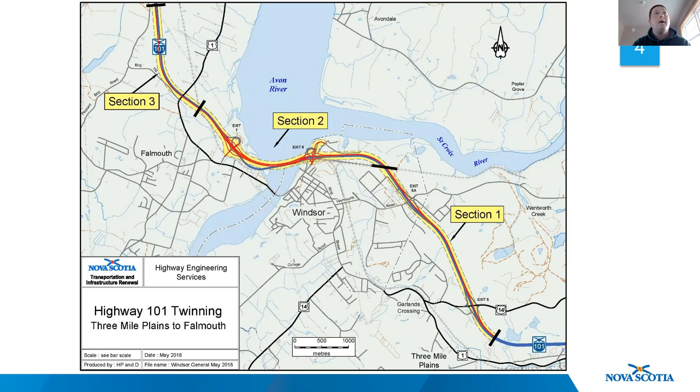Section 1 is generally from exit 5 down to just west of exit 5A at the Windsor Railway overpass. Section 2 got broken up into two sections: 2A, which goes from the railway overpass to exit 6, and 2B, which is basically from exit 6 into exit 7, the Causeway area. And then section 3 goes from exit 7 down to the current twinning section just before Hantsport. So that's just a general overview, so as we get into the next couple of slides, you'll know where we're at.

So the first slide is generally talking about updates to section 1. What we've done so far is we constructed the new westbound lanes a few years ago, paved them, and opened them to traffic last year. Then we started working on the eastbound lanes and did some upgrading to that. This fall and winter we actually paved them, and now section 1 is open to fully divided traffic.

Probably today, anyone that's been through the town will notice that the barrels and a lot of the temporary traffic control devices are starting to come down now that we've installed and wrapped up the center cable median barrier. We did the replacement and new construction of two structures at Trunk 14, the two new structures at Wentworth Road, and we also replaced the Windsor Railway overpass with a new multi-plate structure.

We will be in this section again this spring for a bit. We do have some deficiencies to clean up, some shoulder gravels to put on, and some general cleanup to do. So we will be around, not for a long period of time. It'll be 4 to 6 weeks, but then we'll have that section wrapped up and we'll be out of there for a while. So go ahead, Justin.

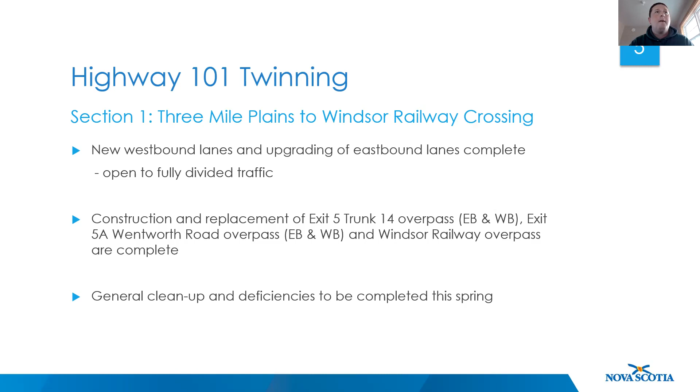So the next couple slides are just some general photos. Here we're at exit 5, looking west back towards the valley. You can see we're open to divided traffic here. The next slide, we're at 5A, so you can see the Wentworth Road roundabout, and we're looking east back towards Halifax.

This was taken yesterday. The barrels and all the temporary traffic control devices have been removed as of today, so now this is a fully divided section of highway. And again, we're still at 5A, but we're looking west in the opposite direction. Same thing, those temporary devices have been removed and we're open to full divided traffic through this section.

So as we get into 2A, we're basically from the Windsor Railway overpass coming back to exit 6. We've completed the new westbound lanes, so that was new subgrade work. We've paved it and opened it to divided traffic as far as exit 6. We do have a temporary transition from 4-lane divided to 2-lane, 2-way traffic at exit 6 as we approach the causeway, so the causeway is still 2-way, 2-lane.

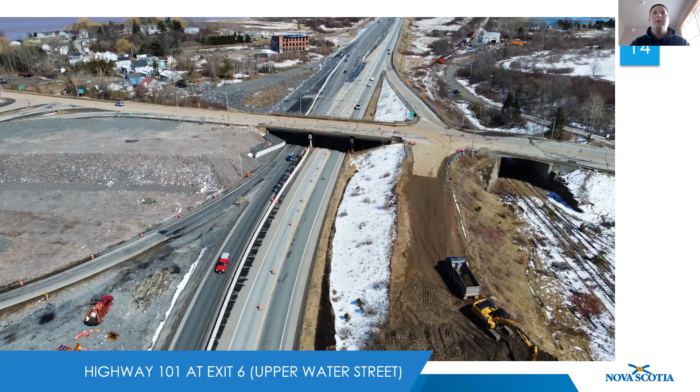And we go on to the next one, which is section 3. So this is kind of an update on section 3. So the eastbound lanes have been completed, and probably most people notice that they're paved, and it's set in there. I'll talk about that in a second. The new wildlife structure, we did put a wildlife or deer crossing structure in this section, and that is now officially completed. And we did finish the extension to the Elgin Creek box culvert. And we did also upgrade, again, some municipal infrastructure, water, sewer crossings, in this section as well.

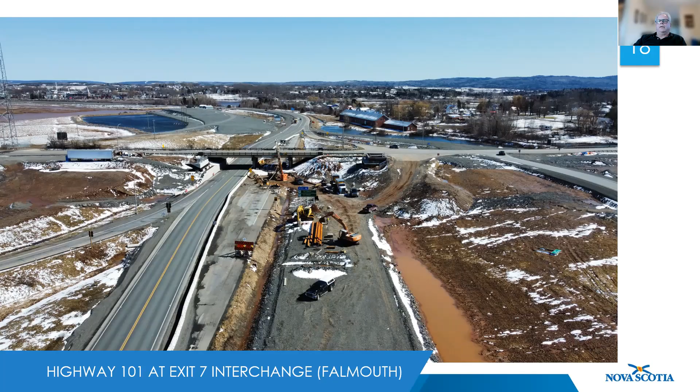Thank you for that, Lyle, and thanks for your consideration of the suggestions. Thank you. Thank you, Liz. And Liz, there's no quota on questions, so I'm not quite sure what's happening with your hand raising. There's nothing that would be preventing it, that I know of at least. Anybody else? I don't see any other hands showing. Going once, going twice, three times. Lyle, thank you very much. Thank you, Guy. And Justin?

Yeah, thank you, Lyle. That was a great overview. And I've got my power back, so that's good news as well. Hopefully this will be a little more seamless and reliable.

So thank you, everybody. I'll kick off the next section of this presentation, providing a general update, recap, and status update on the Avon River aboiteau and causeway upgrade components. And then we are going to turn it over to CBCL to get into a little more detail on the design progress.

So just to first recap, the primary objectives of this project from the beginning and from a provincial perspective have been to improve public safety. Enhanced flood protection is the big one associated with the aboiteau, to ensure climate change resilience and to protect against flood risks and vulnerability to sea level rise in the future. This is also coupled with the need to protect critical public infrastructure, communities of Windsor, Falmouth, and surrounding areas, as well as valuable agricultural land.

Improved highway safety, obviously from a Public Works perspective, is a major objective as well, through completing the twinning of Highway 101 across the Avon River, while also benefiting from the flood control system to protect the highway and the associated bridges. That's why this project was pursued in a coordinated way to address both of these public safety needs.

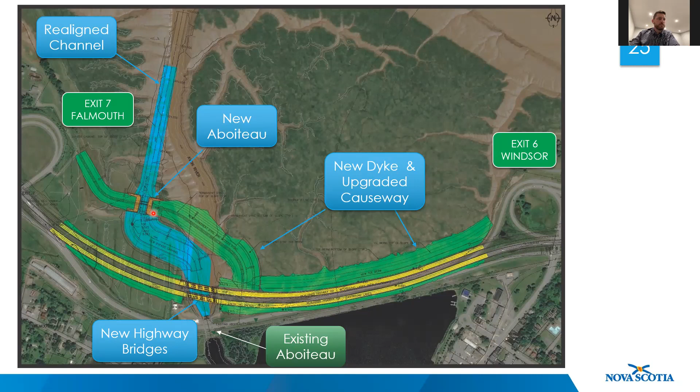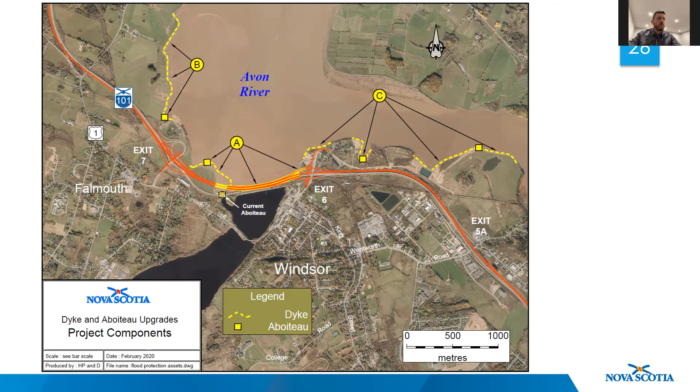And lastly, to recap, the design approach for the aboiteau and the causeway upgrading has been to focus on a flexible and adaptable solution. So one that meets both the needs today, but also is adaptable and flexible to meet the needs in the future. So the aboiteau has been designed with a wide range of functionality for both flood protection and fish passage, and includes a range of potential operating scenarios.

One of which being maintaining a freshwater lake, and this was initially proposed to DFO in our application of 2020, but following that application in March of last year, it was deemed inadequate for fish passage. And actually the following spring is when DFO implemented the current ministerial order, which has changed how the existing aboiteau has been operating ever since.

The other two scenarios that we've been focusing on are what's considered a brackish lake scenario. So this scenario basically allows some tidal exchange through the aboiteau, but maintains a fairly consistent water level upstream that would be comparable to what that historic lake level was, but it would be higher in salinity and sediment as you would expect in more brackish conditions. And the last one listed here is a dampened tidal scenario. So it also can allow a greater degree of tidal exchange, creating basically a more natural estuarine environment.

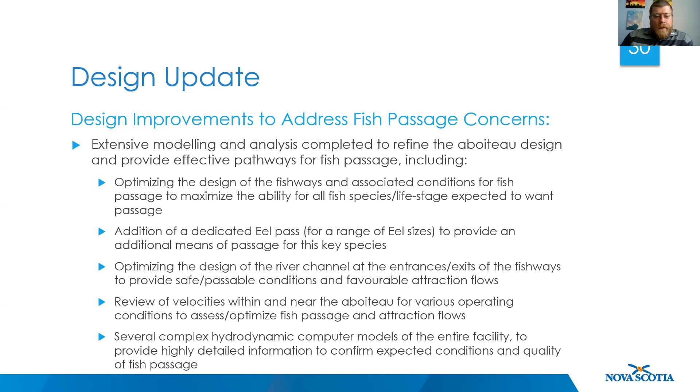Associated with that, one of the key areas that we've been continuing to refine is how the water can be controlled as it goes through the structure, in terms of how the various channels and gates are able to be operated. And as Justin said, there's a wide range of scenarios that these can be operated to achieve a number of objectives. But at the end of the day, we have to satisfy the regulatory requirements and mitigate flood risk. So that's always the goal for these various design efforts. So based on feedback from DFO, we have been focusing on the operating scenarios involved with tidal exchange, which include the brackish lake and dampened tidal scenarios that Justin suggested earlier.

One of the most recent modifications of the gate design allowed for a vertical slot in the main channel itself to provide more passage opportunities at all water depths for various species that like to swim at different depths, in different velocities and different conditions, and to avoid significant pressure drops for any fish or other types of species that want to use this but don't find their way to the fishways or the eel passes themselves, to avoid large pressure changes as they're going through the main channels, which are primarily the flood control channels,

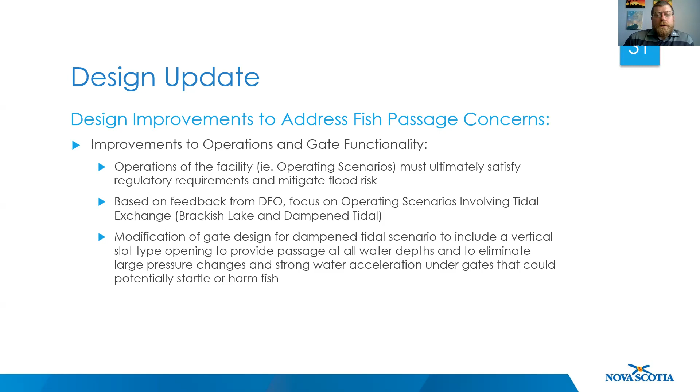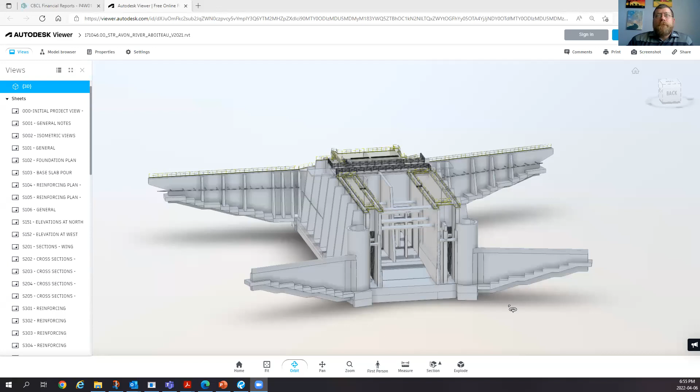Just one moment, guys. I'm gonna have to share. Yeah, you may want to share instead there, Colin, then we'll jump back to my screen here. That's what we'll do. All right, can everybody see that? No change yet. Oh, here, I have to actually hit the share button, so I think it's probably good now. Is it moving around? Yeah, we're seeing it now, Colin.

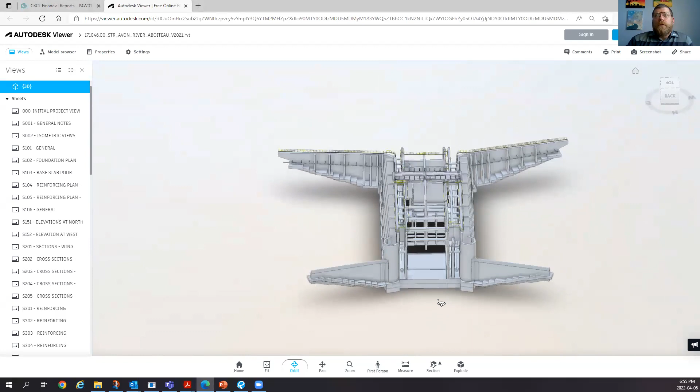Perfect. So I'll just start at the top here, so you can see this is kind of what it looks like from the top down. This is the Bay of Fundy side, and this is the Lake Pisiquid side. I'm going to go and look at the end view for now, so you can kind of see clearly where the main openings are here. Fishways are on either side. You can see some of the baffle structures are inside, and then this is actually the eel pass here.

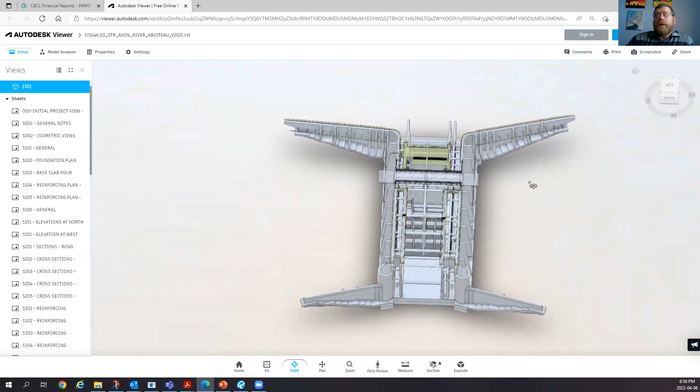You can see there's some significant retaining walls to allow us to control scour and erosion around the structure, and to contain the embankment and dike slopes. There's an access bridge on the top and a number of catwalks and manways to allow for maintenance and whatnot. What's not shown here are the gates. There's a series of gates that are planned here, including what we call a passive flap gate, which is sort of a traditional aboiteau gate, as well as roller gates.

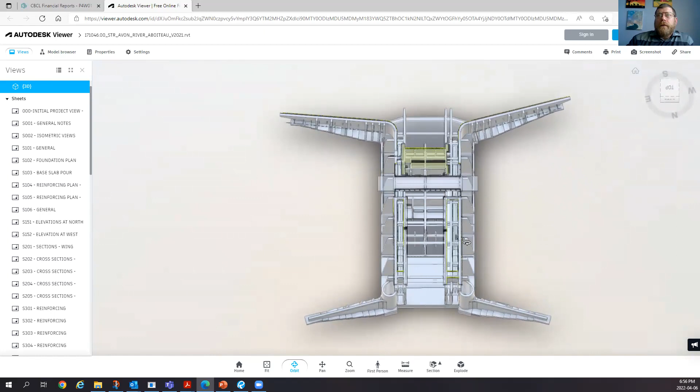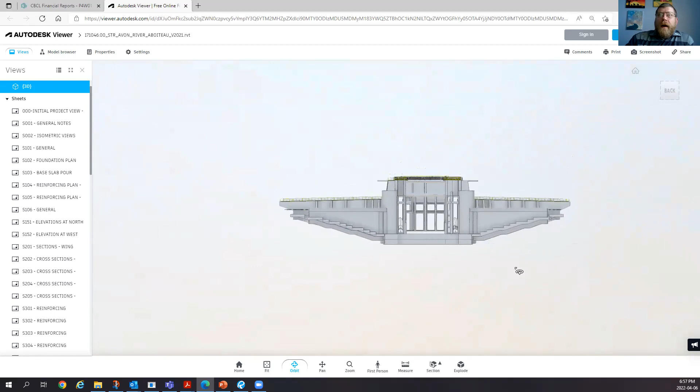There's a few versions of the flap gates themselves for the main openings, as well as emergency backup in case there was a blockage of some sort or something stuck in the main opening, so that in case of a blockage at the worst time, where maybe you have a major storm happening, there's always a safety net for that to be relieved, I guess. Yeah, so that's that. You can kind of see the front end here. There's a few additional features that have been added to improve flow conditions, to smooth the flow of water around the ends of the structure, again to accommodate or improve potential fish passage.

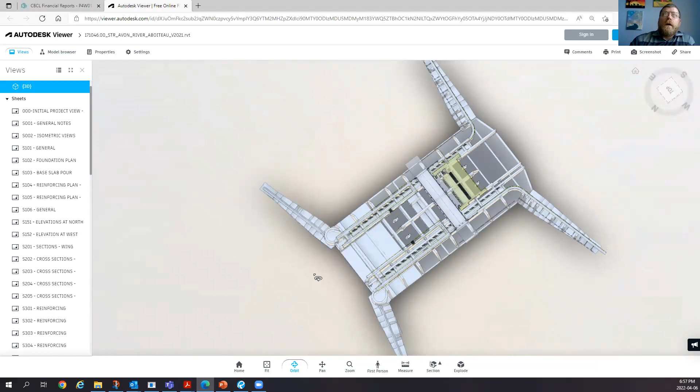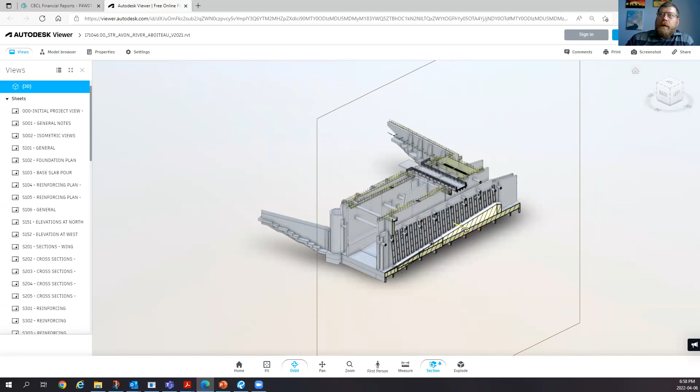I think it's probably a good overview. Maybe what I'll do is I'll just do a quick little slice through here and show sort of the inner workings of this, to see generally how each part is. So I'm just going to stop at the fishway initially, so you can see what that looks like. So this is one of the two fishways; they're the same on either side. And you can see there's a ramp to help control velocities within the structure, and then these ladder-looking items are actually baffles, which help slow the water down within the fishway and make it more appealing to fish.

I'm going to slide into the eel pass. It's not very wide, so sometimes it's hard to hit.

What's going on there? There it is. So you can see there, it's also a ramp, but it has sort of landings or resting areas. This is about, I think it was about half of the maximum slope that you can use for these types of facilities. So it'll have almost like a really coarse AstroTurf, or it's almost like a Plinko board that you would see that would be placed on this ramp, so that the small eels can wiggle their way up through the structure.

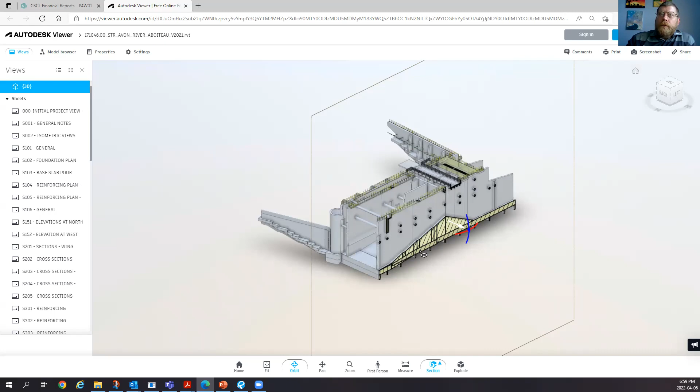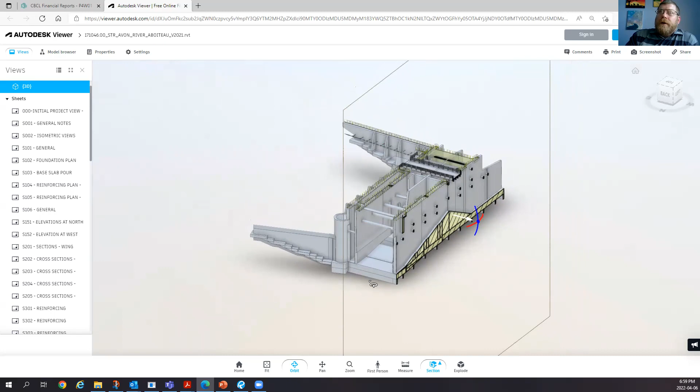And it doesn't matter if the water is low or high. Apparently they'll use it either way. We do have a water supply system that ensures that this ramp stays wet at all times, as well as a washing system that allows it to be flushed of sediment. That's been one of the major design considerations throughout the entire project, is the amount of sediment that is carried in the water here. It presents significant challenges for maintaining structures like this and ensuring they always operate the way they're intended and don't have buildups in areas and cause problems.

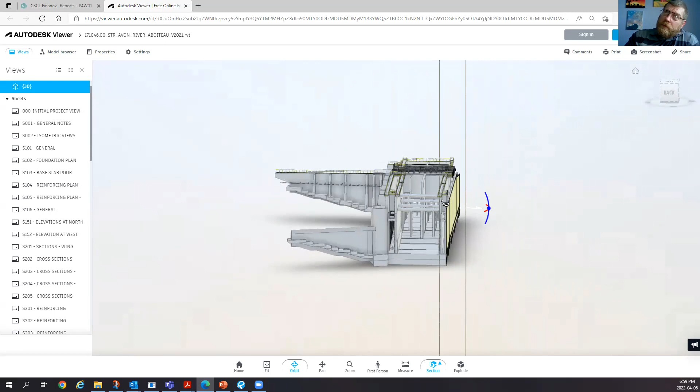You can see there's lots of supporting struts. This is a very large structure. This is approximately 20 meters tall by 25 meters wide, I guess, for the main part of the structure, not including the wing walls. So the forces that we're dealing with here are very, very large.

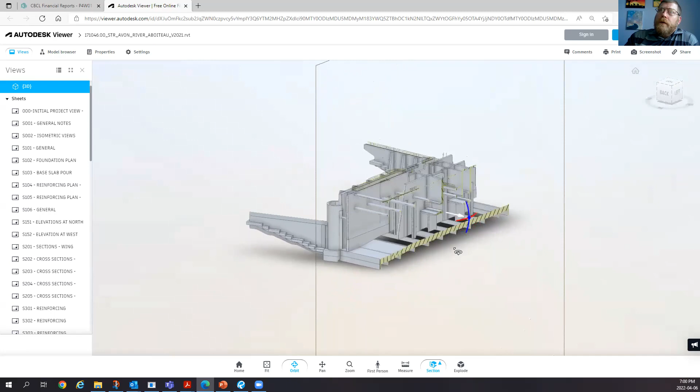So you can see here, as I keep going in, you get a sense of what the inner workings of the main channels look like. These are all structures to hold gates, both the roller gates and then the flap gates, as well as stop logs for maintenance, so that we can close off the structure in case there's a problem or just regular maintenance to complete.

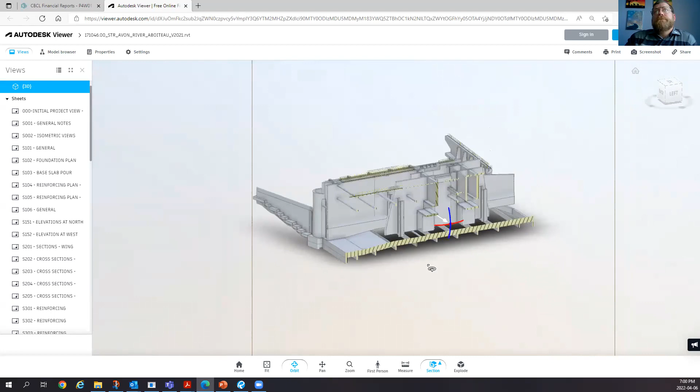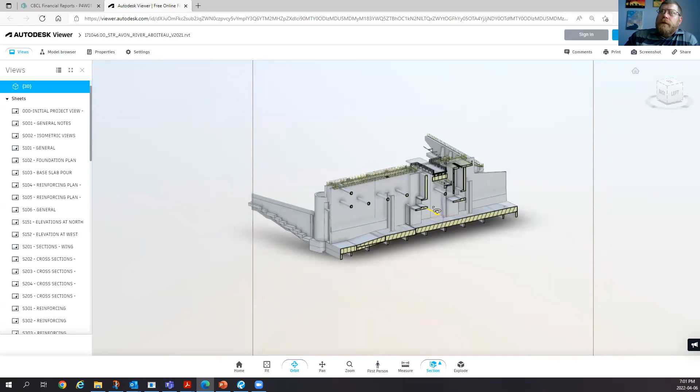And you'll see the inner structure of this is a little bit different from one side to the other, as there are slightly different gate configurations and operating requirements for both the brackish and the tidal scenarios. So that's where the design flexibility comes into play. And then, like I said, the fishway on the other side is just a mirror image of the other.

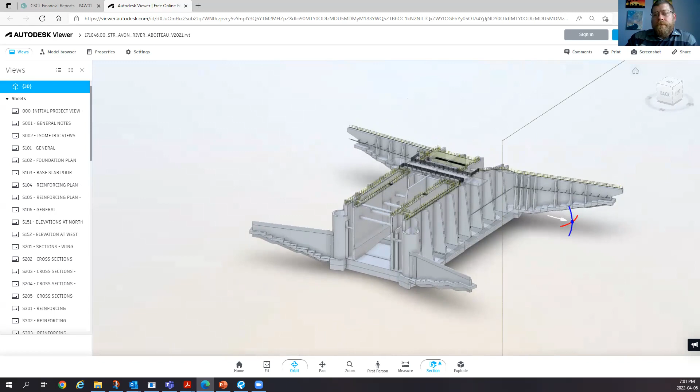So, did anybody have any questions there? I know there's a lot to take in right here, so I thought maybe this would be a good time to allow people to put their hand up. Yes, Liz? Yeah, I've got questions. Can you confirm the hierarchy of control over the aboiteau? Who owns it, who's going to run it, and who makes the decisions on it?

I will throw that question over to Justin. I may throw that to Kevin. Kevin, are you still around? Do you want to answer that, given it's owned and operated by agriculture? Yes, don't know if my video is working, but trying to click some buttons here.

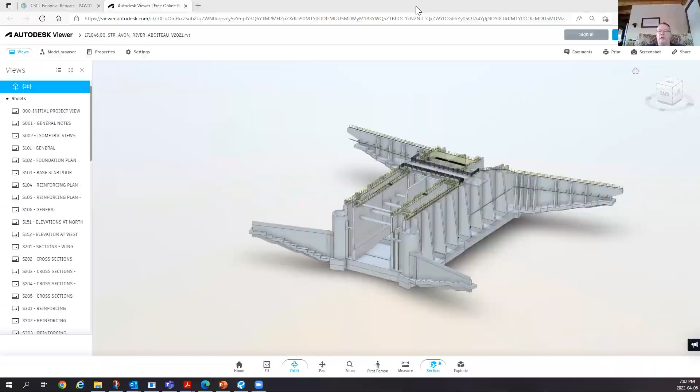So yes, we are the client, the Department of Agriculture. We operate the existing infrastructure, and we will be operating the new infrastructure. There have been some discussions about having a governance committee involved in that, representing various stakeholders and rights holders and DFO. So some of it will fall under the regulator of how it will be operated. And they have asked us to provide an operational scenario with the structure, and that's where a lot of the work has been focused this past year and a half, as Colin and Justin have described. So I'll pause there and see if that's answered your question. It has partially.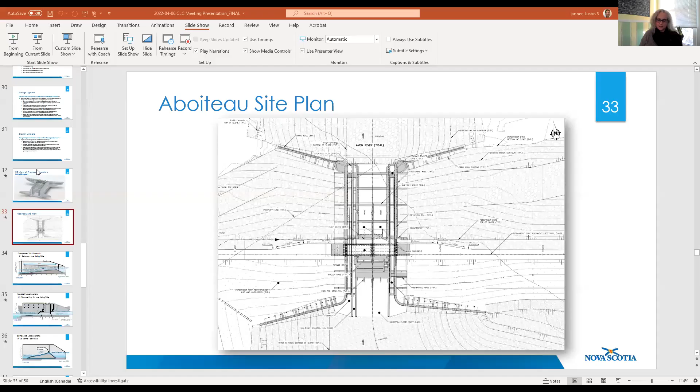Will there be a resolution process for conflicting priorities within that management team? And I'll just throw another question in there as well. Can you confirm that there's a system in place, or will be in place, to be aware of fish movement for maximum effect, kind of like an early warning system, so that we don't have one species or another, or a big lineup at the gate not getting through because they're two weeks early from their usual time frame?

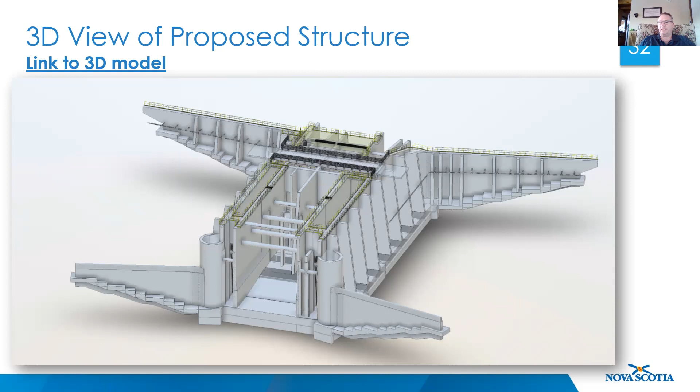So a little complex to answer in all that detail. My understanding is from the operating scenario, we're going to have dedicated fishways that are open 24/7. So there'll be some minor adjustments and tweaks on that in a major flood event. But the idea is to be able to pass fish 24 hours a day, 7 days a week, 365 days a year. So DFO is not looking for any stockpiling of fish outside of the gates in one direction or the other.

And as far as resolution aspects, we're looking for an operating scenario, and it would be more about communication and awareness and what's working and having discussions. But I don't know if there would be acceptance of a resolution that we want to change X, Y, Z. There'll be a set operating procedure on that. I was thinking conflicting priorities as we go along, not in terms of policy, but just in procedure on a time by time basis.

Yes, and it's hard to speculate on what they may be. So community flood protection would be number one and fish passage is number two. And whatever we can do to the maximum extent possible after that is how we would like to do it.

Okay. I have a question for Lyle. I have two questions for Lyle.

Just because it's been a long time since we've met, can you confirm the speed limit through the corridor once it's completed? Yeah, so as soon as we complete our full 4-lane divided highway, it will be 110. Okay. And can you confirm that we're going to have a hopper lane, I call it a hopper lane, at the far right for local traffic between exits throughout the entire construction corridor? Yep, that's correct. So the farthest right lane between 5 and 5A, 5A and 6, and 6 and 7 will all be just connected ramp lanes. So yeah, it'll be quick. Basically, that'll be a ramp lane between all exits. Yep. Sweet.

Okay. If nobody has any other questions on the structure itself, I'll touch on a few other things here as we go. So this is more just a top view of the structure, again, just to show the dike itself and how it matches into the channel a bit more. Again, you can see the top is the Bay of Fundy side, where you've got sort of the rounded noses on either side to smooth the flow of water in and out of the fishways. And then at the upstream end, you can see a similar rounded area, but slightly different just because of the different conditions and the various site constraints that we've had.

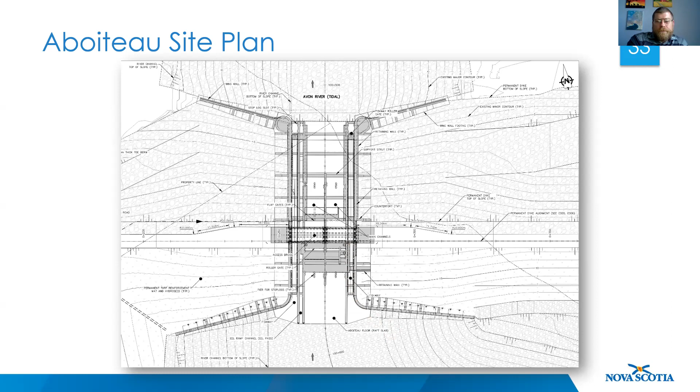Next slide. This is just a quick representation of one of the scenarios of how water will be within the fishways. You can see the ramp is intended to hold the water along the fishway at a specific depth, and one of the design challenges is the various scenarios have different operating water elevations. So the structure is designed so that we can actually alter the high end of that ramp, whether it's tidal or brackish, to optimize the flow of water through those fishways and ensure that the velocities stay within those optimum ranges for the fish.

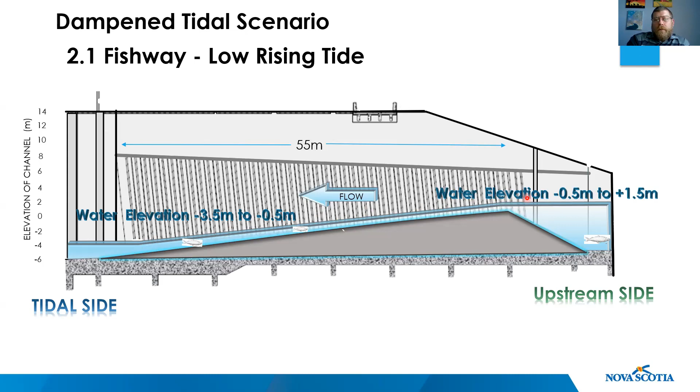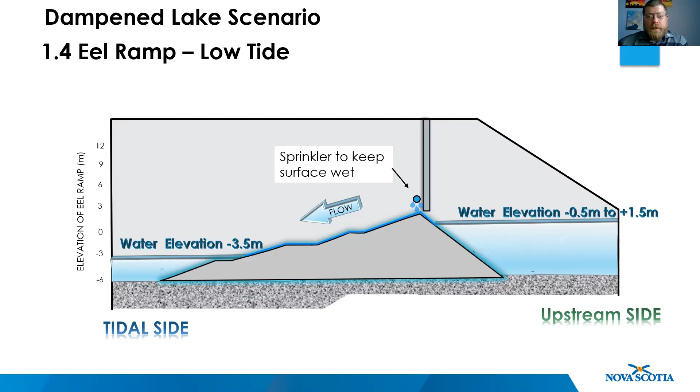So yeah, just wanted to touch on the operational scenarios a little bit. Again, for both of the brackish and dampened tidal scenarios, which we've been encouraged to focus on. The dedicated fishways and eel pass are always open for both of these scenarios, except for maintenance or the odd extreme storm event where we may find that all the gates should be closed to ensure that the town of Windsor is protected. But that's not very frequently at all.

The brackish lake scenario does allow some tidal exchange while maintaining a constant water level. That's the key aspect of this, and that water level is equivalent to the historic target water level that Lake Pesaquid has been operated at.

And the dampened tidal scenario allows for a larger amount of tidal exchange and a more, Justin, you said that word a lot better than I'm going to try. Estuarian, or I can't say it. Estuary environment. And it'll fluctuate by 1.5 to 2 meters. Probably a little less than the full range most of the time that we see here.

And the level of the upstream is likely going to be a little bit higher than what's there now, but we don't have a ton of current data on, I guess, the upstream level fluctuations as it's been operated for the last little while. I think that's what's up next there, Justin.

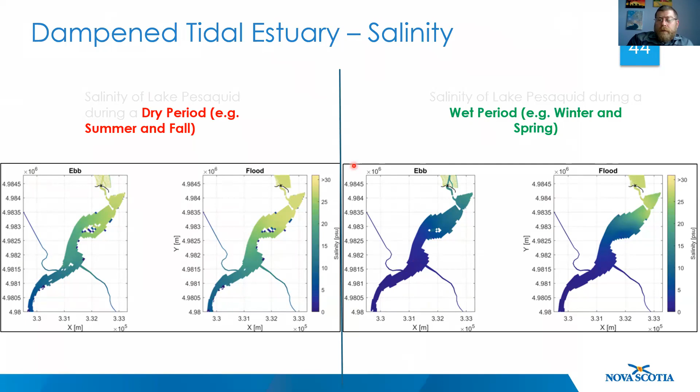So I know one of the questions that Liz had was around the post-construction monitoring plan. Maybe before I jump into that, I should ask if there's any questions on the design, because I'm going to jump to the post-construction monitoring plan, and Melissa's going to take over from here. But maybe I'll look for hands and we can go from there. Ken, I see there's multiple hands, so I'll let you direct traffic there. Sheldon, go ahead.

Yeah, just curious. I see the salinity stuff is on there, but what I don't see is anything on the sediment deposits, and I know that was part of what was brought up in some of the early design scenarios, that there's significant sediment coming in with each tide, and we continue to build up those mud flats. In either of these scenarios, have we modeled what that looks like, 5 years out, 10 years out, et cetera? Yes, there has been modeling done on the sediment accumulation.

I think the tidal scenario is expected to carry more sediment in, but at the same time carry more sediment out. So I think the expectation is that there will be a buildup of sediment, particularly on the lake closest to the highway. And I think we do have more details on that. I don't have it here with me, but if you reach out to Justin or even DFO, I think they do have more information on that from us that we should be able to provide.

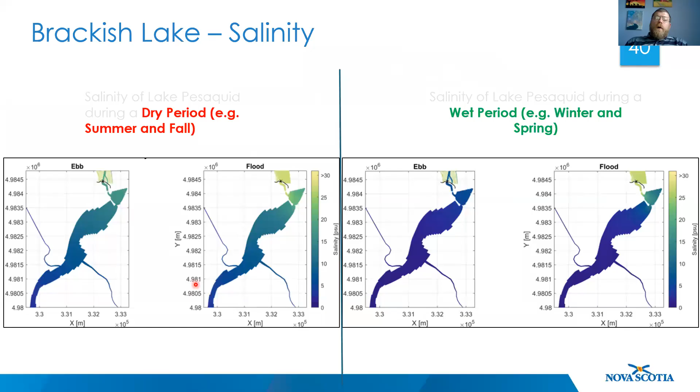Under the brackish scenario, you're going to see a water level very similar to what you have traditionally seen, or at least seen over the past 40 years. There might be a half a meter change up and down during significant storm events, and during periods of dry or wet there can be a little bit of additional fluctuation, but generally speaking, it's quite close to the existing or the original lake, we'll say.

For the tidal exchange option, the level of the upstream lake is expected to be most of the time in the 1.5 meter range between low tide and high tide. And again, during larger storm events or larger tides or a combination thereof, that range could reach the 2 meter range or so.

Colin, just to add to that for additional reference, I think we've determined the low tide under dampened tidal would be somewhat close to what you're seeing there today under the ministerial order, possibly slightly higher in elevation. And the high tide under dampened tidal would be about 2 feet below that historic lake level that has been around for several decades. So it's about 2 feet lower at high tide, and a little bit higher than what you're seeing today under the ministerial order at low tide.

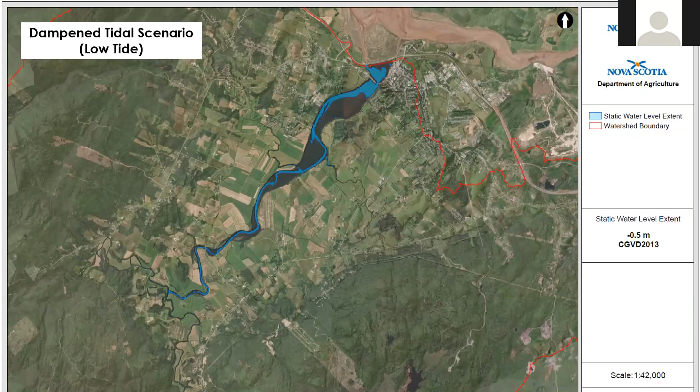Yeah, Jim. Yeah, thank you very much. I guess my question, hard to know where to weigh in here. There's so much here, and we haven't been on the same channel here for the last year and a half. So it's like playing catch up and reacquainting with everything.

So I don't want to take it back with a question, but back on the structure when you were showing the inner workings of it, which appears to be quite complex and quite detailed. In fact, if I can, without offending anybody, it almost appears like a maze. And maybe I'm not looking at it properly, although I am seeing one head kind of nodding up and down. So I guess I'm not that far off on that. Is that for the control of the speed of the water that all the, I'll call it the guts of the inner workings of that is in place?

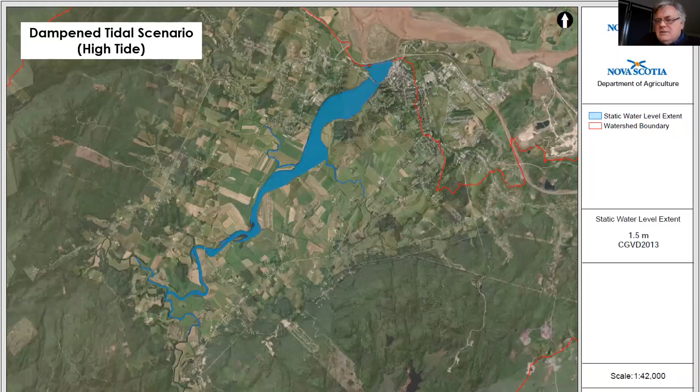I'm just trying to grasp the goal here of getting more fish through, and please, I'm not trying to redesign the fishway. I just want to understand all the inner workings in there, where it just seems to me that a clearer, more open structure would have allowed more fish to get through. But maybe that's where the water speed comes in. Yeah, that's the thing is water speed.

So here I'm gonna share my screen again, Justin. Thank you for taking me back. Yeah, no problem. That's what it's here for.

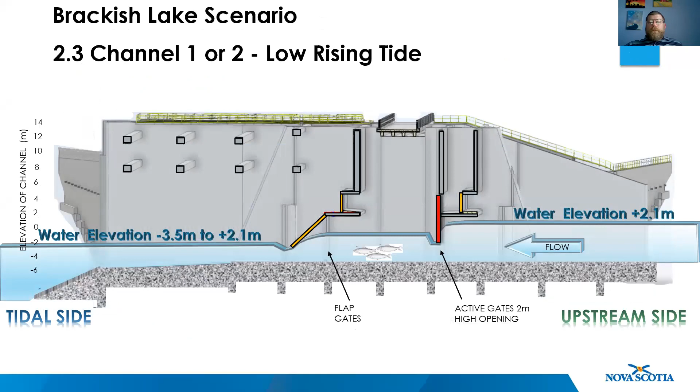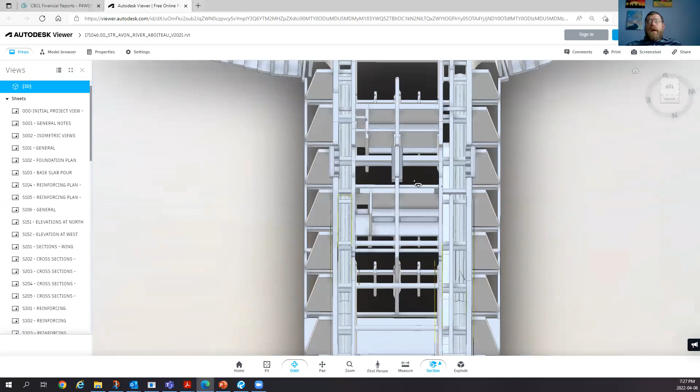Yeah, so this is just again an end shot of the structure, just to make it a little simpler to talk about for your question here. So in effect, these are the main channels, or ultimately there's two main channels here. You can see sort of the main dividing wall between the two. Now, it does look like there's a lot of things in the way, and a lot of that has to do with structure. We need to hold gates, we need to hold stop logs, we need to make sure that people are safe if they're working in there.

We need redundancy so that if one gate gets blocked, we have the ability to deal with water through the other gate. And this is where the large majority of flood water needs to pass to protect the town of Windsor. And because of that, velocity control is very difficult in this type of a structure. You can squeeze gates down as much as you want, but you still have concentrations of flow as it goes through smaller openings when you move those gates around. So that's where the fishways and the eel passes come into play.

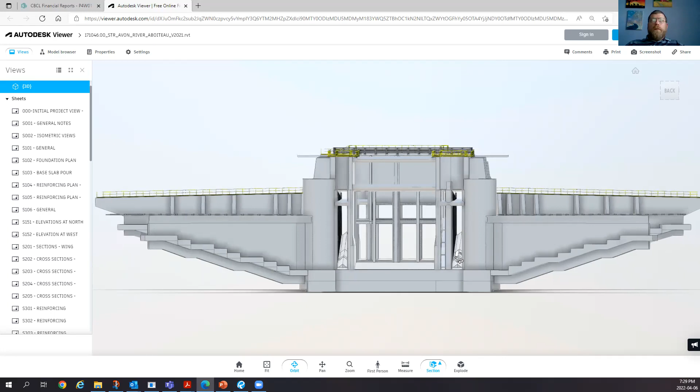So in order to allow the water to flow back and forth as needed for stormwater flow and flood protection, we provided these zones on either side, which are controlled with baffles and things that roughen it, and the slopes that allow things to be managed. I guess you can imagine, if you look down from the top, I don't know if you've ever stood at the end of a culvert when it's blasting water out into a lake, but there's always sort of a jet that comes out straight out from the structure for some distance, and then it starts curling back on itself.

So in this particular scenario, that's why you see a lot of these walls are extended, for example, like these couple, as well as these couple. These are extended to continue to extend that jet of water under flooding conditions, beyond the influence of the sides of the channel where fish tend to prefer to travel anyway, so that they can find their way in and out of the fishways as often as possible.

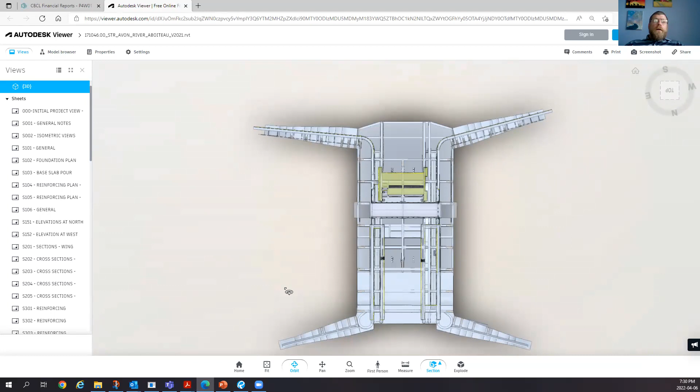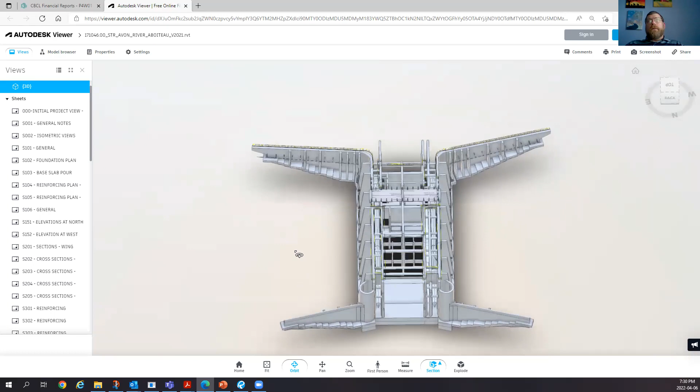And I think one of the key aspects here is that even in natural situations at low tide on these estuaries, the river flow tends to be quite fast, and it's not really very appealing for fish in most cases anyway. But as the tide starts to climb, or as it's just falling, and when the difference in the elevations on either side is less, those are the periods where we're trying to maximize opportunities for fish to pass. So I don't know if that explains some of the questions, Jim. It's a pretty complicated question to answer, but I tried to give you the Coles notes. No, that's great. I appreciate it.

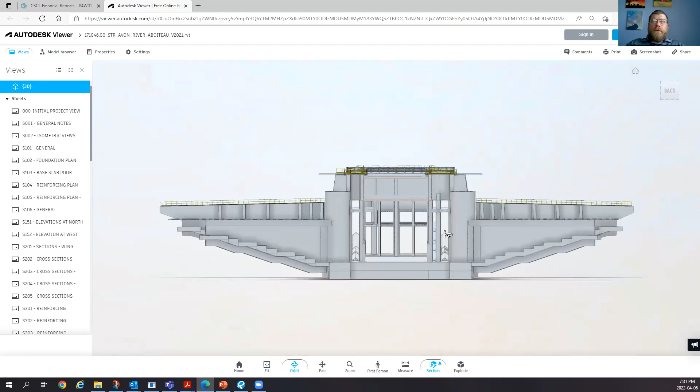And so the fishways that are going through, they're fairly straightforward. Again, excuse my using the term maze, but it just appears that there were corners that needed to be turned or whatever, but it's a straightforward pass for the fish, right? It is straight through, generally speaking, and we try to make it as straight as we could without having things in the way. But one of the things you'll see, for example, all of these features are rounded, as an example.

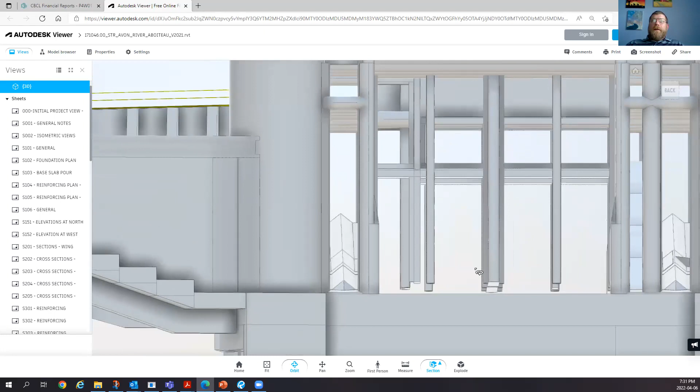That's why you'll see these are all not square, because you can see all the leading edges of features are rounded, because fish are going to get sucked in there, and they're going to end up going for a ride, and we're trying to do whatever we can to optimize the potential for fish to get through without getting harmed in the case that they end up in the wrong spot.

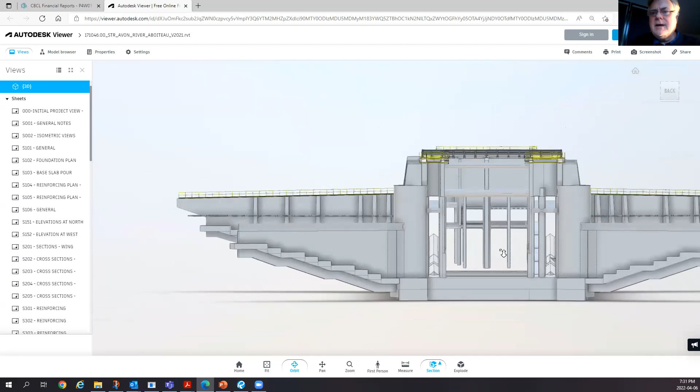Any concerns or issues with this as it relates to people or people in boats or kayakers or anything like that getting sucked in or pulled through? Was there anything like that taken into account? We had a fellow back in the late 70s that I think actually went through the existing aboiteau. I may have that a little bit wrong, but any protections in there to prevent anything like that happening?

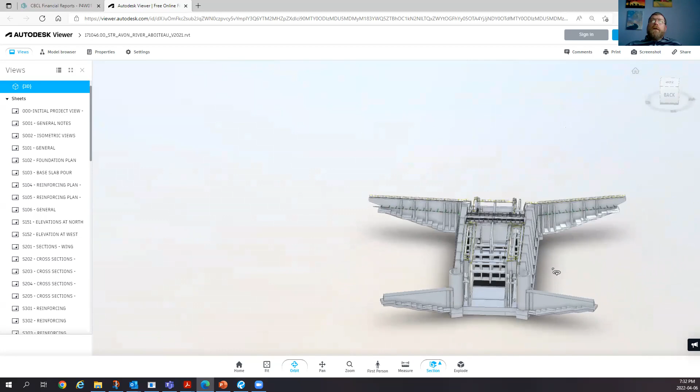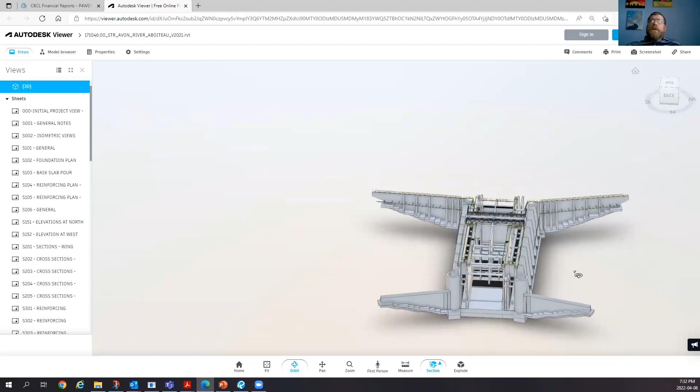I think that's a good question. I think upstream, we've been assuming that the boom that's been in place for some time will remain in place in that location. But this particular aboiteau structure is quite a piece from the highway. It's not going to be an easy spot to access with gates and so on, and it's going to be quite a chore to get out here. So I would say that the majority of the structure from the outside is protected with handrails and whatnot to prevent people from falling in from up top.

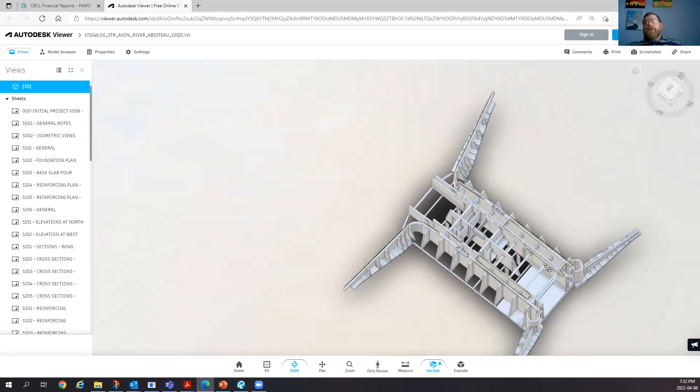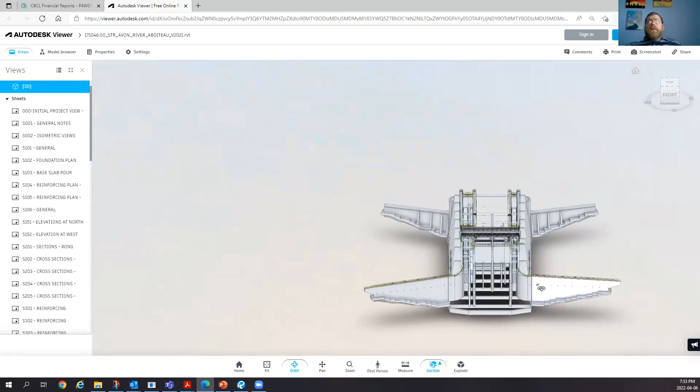But the boat question, it's a good question. I would say that the arrangement of the structure with it not being a closed-in barrel would probably reduce the risk. But that's not to say that if someone was being a dummy and got too close to this thing, they couldn't get into trouble. But yeah, I'm not sure how to answer that any further.

I guess the other question is that this sits up above the water. In other words, it's not something that you'd be able to float over the top of, right? Oh no. This would be difficult to float across for sure. Yeah. Okay. So that's good on this for now. Thanks very much. Just one other question.

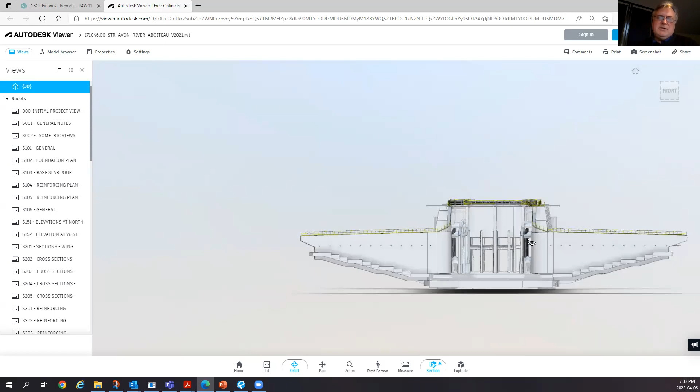If I go back to the question on sediment raised by Sheldon, I think, and in trying to find that middle ground or that balance, there's going to be some more sediment coming in, but ideally more sediment going out. Which option provides the greatest propensity to keep the channel and the water portion of the inner lake and so forth as deep as possible? The freshwater option. Sorry? The freshwater option. The scenario that DFO has said it's not going to go with. Got it.

Anytime you're allowing water in and out of the lake, it's going to bring sediment. The brackish scenario doesn't allow as much sediment in on a tide by tide basis. So one would think that, over time, it will still build some sediment, but not as much. I think the tidal exchange scenario or dampened tidal scenario will let more in and out.

But one thing to note is, although we do our best to predict these things, it's incredibly complicated, and essentially a best guess with the amount of information that we've been able to gather, and that's not to say that there isn't a lot of information available. There is. It's just highly variable everywhere you go in this entire system, from several hundred meters downstream to several hundred meters upstream. So although we've made predictions, it is just that, and the highly variable nature of the system really limits how much we can estimate in that respect.

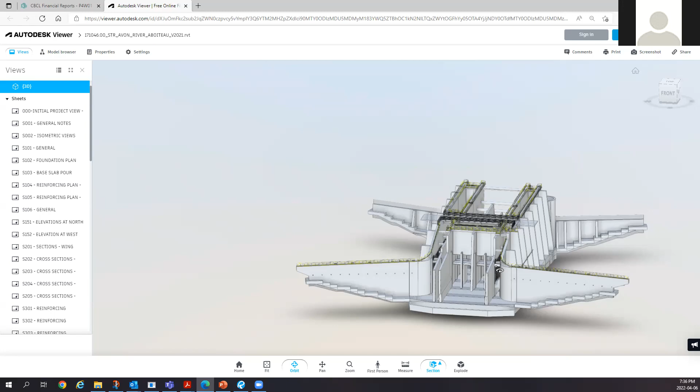When you say holding it, is that because we're embargoing the water in some sense, or is it just based on the? Yeah, to a degree, we're holding as much water as we can through the seasons to still operate the fishways. But the challenge is through the drier months, we have to let a little bit more in to kind of replenish the lake so that fishways can continue to operate at their optimum levels.

I think that's good for me now. Thanks very much for letting me get back to the structure for those questions, and thank you. Jim, Liz has her hand up.

This question just came up in my mind during the talk of the sediment. Does anyone know if there's a market for some sort of commercial or industrial use for ocean sediment? I've seen stories about there being a shortage of sand in the world, and it just makes me wonder, if there was a buildup of sedimentation, is it something that could be maybe an opportunity? Just putting that out there.

I mean, that's a pretty complex question. I think there's a lot of factors there, in terms of harvesting sand and the environmental implications associated with that too. So I'm not sure that that's been considered, and probably a difficult one to answer. I don't know.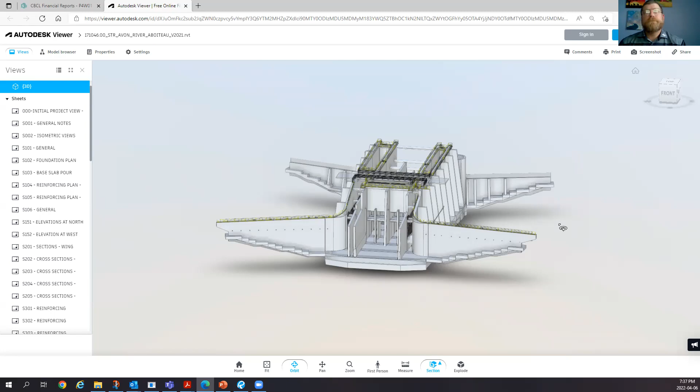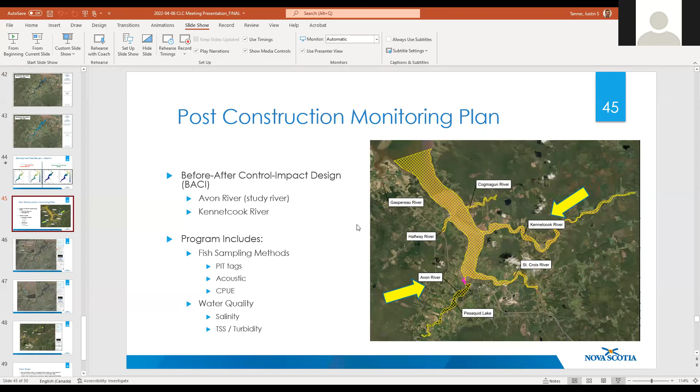Any other questions? Okay, I think you can move along, Colin. Okay, Melissa, over to you. I will stop sharing, and Justin, you can jump back in there. Thank you, Colin, for all of that. No problem. Just launching that now. It should be good to go, Melissa. Perfect. Thanks, Colin, for foreshadowing part of this program.

So before I get into it, I do want to characterize that this is the plan that we've developed for documenting fish passage. So we're looking at fish habitat, how fish are moving through the structure, like where they're kind of moving within the system. This is in addition to other post-construction monitoring that we're proposing for effects to the wetlands themselves, and some of the habitat changes that may be occurring within the upstream. So I just want to give that a little bit of context, and then kind of now look at what we're doing for this program.

So as part of this post-construction monitoring, we're looking at the much broader Avon River area. And in thinking about how to design this program, we looked at a couple different approaches and ultimately ended up selecting the before and after control impact design. And what that means ultimately is we've designed a program that allows us to assess conditions prior to construction and after construction, and that we're also able to compare it to a reference site.

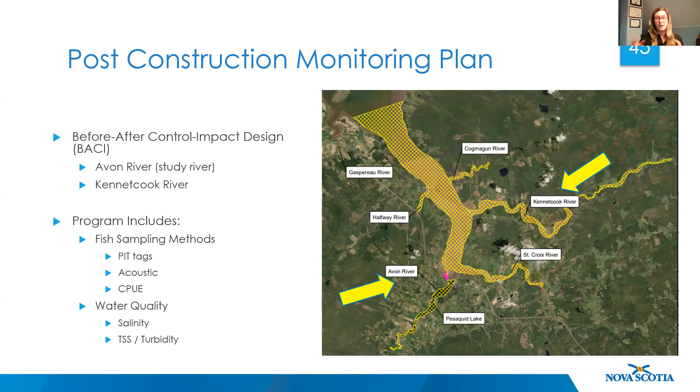So to kind of give a magnitude of scale of where we're proposing some of these sampling locations, we have prepared a subsequent draft plan, and we're looking for feedback from DFO ultimately on this plan. But just to give you a scale, we're not just looking at putting receivers at the new Aboiteau structure or the old Aboiteau structure. We're also looking at other key aspects, either up or downstream. So this is just focused preliminarily on the Avon River and upstream of the proposed structure.

But if you can see the areas denoted in red, these are where we're looking for PIT tags, which we're going to be using to determine the actual movement or passage of fish through different structures. Very reliable, frequently used, and currently used within the broader system. If you want to move on to the next one, Justin, thanks.

So we're also looking at where and how fish are moving. It's a different application than just whether or not a fish has passed a threshold, but we're going to be looking at using acoustic receivers. The interesting part about acoustic receivers is they allow us to understand where a tagged being may be within a 3D space. So this is really important for understanding how fish like to move through the structure from a fish behavior perspective.

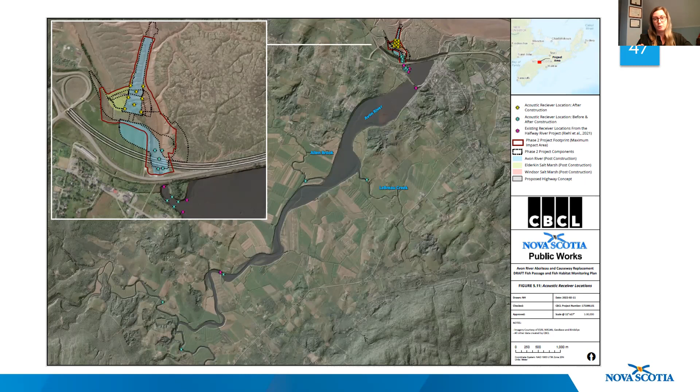That's great. I apologize for anyone with color sensitivities. I can try and describe this a bit better, and put your hand up if you can't see that. So looking at the Kennetcook River as well, we're using similar approaches. We want to know what's passing. We want to know how it's passing. Like, from a behavior perspective, where is it positioned within the water column?

As well, we want to get an understanding of general fish habitat, such as salinity, dissolved oxygen, suspended sediment, and temperature. Temperature is a very important part that's going to be considered in both, and can actually be a thermal cue for fish knowing when to pass. That's also really important for one of the things Liz brought up: what happens if they show up two weeks early? Temperature cues are really helpful. And as Colin stated, the new structure we're proposing has passage available 24/7 through the fishways and eel ramp, which is dedicated for operation.

So just for a little bit of color coding, the PIT tag arrays, which are going to be used for confirming if a fish has moved past a threshold, you can see as a vertical red line. The sediment and salinity type probes are in green, I guess. These locations are not finalized, but tentatively proposed. Final selection will be determined based on water depth and if the equipment can be properly affixed. The ones popping in yellow are the acoustic receivers, which will give us an understanding of the 3D space in which fish are moving. For anyone who has color sensitivities, is that okay?

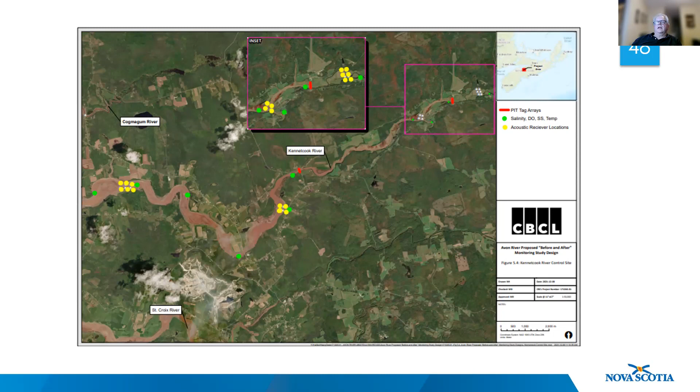Jim, did you have your hand up? I think you did, but now it's down. Jim, you're on mute. Okay, thank you very much, Ken.

I wasn't sure if it fit in with the question here for Melissa or if it goes to Public Works, but the question generally is where we might be timing-wise with the project. Not looking for total completion, but one of the bigger challenges we've had here is what we do as it relates to the lake, river, fish, recreation, and so forth, and where we might be in that interaction with DFO, who ultimately decide what this looks like, and, per Melissa's comments, would be involved in the measurement post event and so on.

Do we have any sense of timing as to where that would be? I think there was a comment made in the House last week about some delay on technical. Again, I don't know if that's highway or if that's fish or what technical is as it relates to this piece of work, which is so vast. But is there anybody that can comment on that by way of timing overall and what we may be looking at here, so that from a community standpoint, we can get to some kind of a resolution?

I know there's still folks waiting, regardless of what their preference is for what we have here, but you've got a lot of people here that are very vested and concerned and wanting to see what's going to take place with this. Is anybody out there able to comment on that?